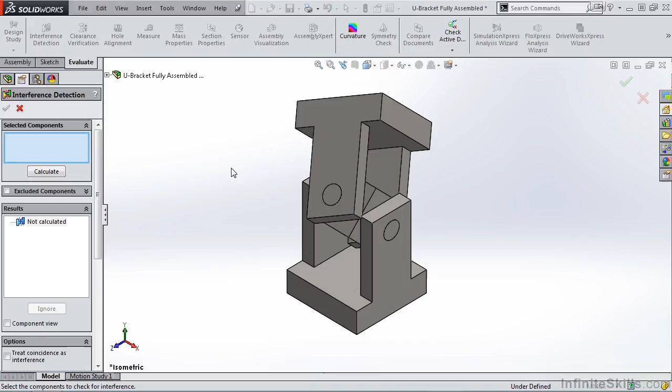Now let's begin. I'll select the interference detection icon and the property manager opens. In the first window, this is where you specify what components you want to check. By default, SolidWorks inserts the entire assembly. In most cases, you want to clear this window and only select the components that you really want to check the interference between. This will greatly reduce the resources required by SolidWorks to calculate the interference.

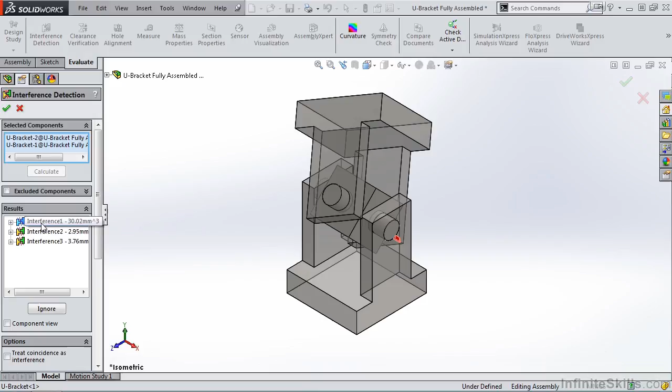Once you select the components, and I select the 2 U brackets, you then select Calculate. Notice in the results window, I have 3 interferences. Interference 1 is located in this area, noted by the red color. Interference 2 is in this upper corner, and interference 3 is on the back side of the assembly.

Also note the interfering parts are shown transparent, and that is because if we scroll down the property manager, you will see there's a check mark in front of Make Interfering Parts Transparent. Let's scroll back up. Any one of these interferences can be ignored by simply right mouse clicking and selecting Ignore.

Now once you ignore it, notice it's grayed out, but it's still showing up in the results window. And that is because we have the Show Ignored Interferences checked. If we uncheck it, it's removed from the window. If we check it, we see it once again in the window. At any time you want to unignore the interference, you simply right mouse click and select Unignore.

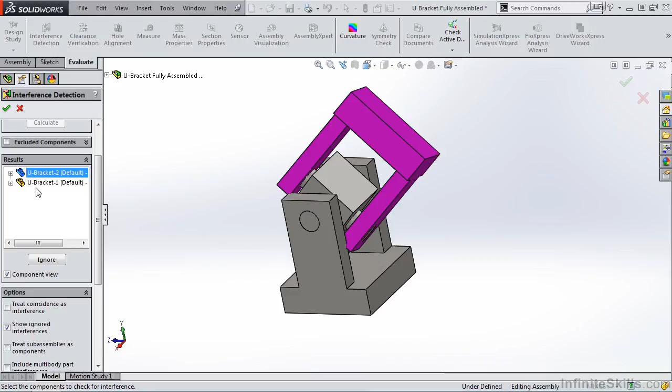Right below the results window, we have a checkbox for component view. If I select component view and let me collapse the tree, notice the window only displays components, U bracket 2 and U bracket 1. I'll uncheck it.

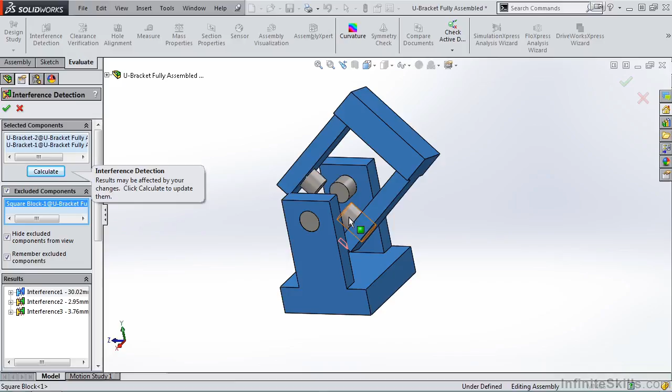Moving a little bit up, notice we have a checkbox for excluded components. Now if I put a check mark here, in this example, I am going to use it to clean up my assembly. I'm going to go out to the screen and select the square block and the 4 pins. By doing this, it makes it easier to see the interferences on the screen. So once again, interference 1, interference 2, and interference 3.

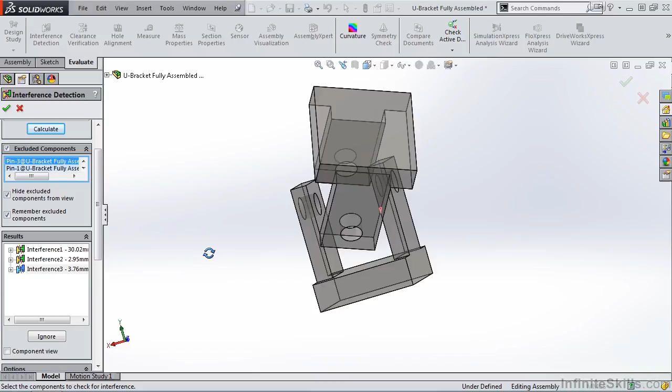So that gives you an idea of how interference detection works, and hopefully when you build your assemblies, this would be a tool that you will use to see if any of your components are interfering with one another.